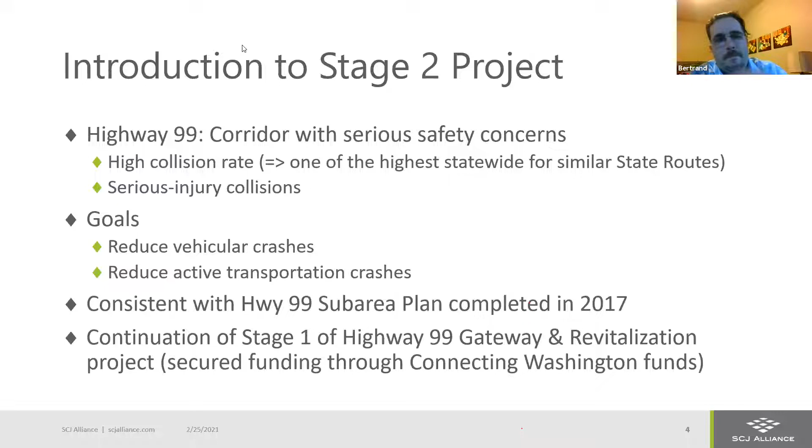A lot of you might already be familiar with the limits of this project, but here's a quick overview. We're looking to do this on the bottom side of the picture on the right, from the south end at 244th all the way to 210th, which is the northern end within Edmonds. You can see the yellow areas delineated — those are the different agencies or jurisdictions along the corridor. It's not just an Edmonds corridor.

As Lisa shows, there's Esperance, which is Snohomish County, so we have to coordinate with them. On the east side of the corridor, south of 216th is Lynnwood and Mountlake Terrace — the southern end, just north of 220th, is Mountlake Terrace. As you go further north it slices to Lynnwood, which continues to the northern end of the corridor. So there's definitely coordination we're doing with this project with those agencies.

On the south end you have the SR 104 interchange, and there are some important active transportation corridors within proximity of the project. There's the Interurban Trail, shown as the blue line, ranging from less than a half mile from the corridor for most of the stretch. You also have the future light rail Mountlake Terrace transit station, currently being built. By 2024 that will be completed, generating a lot of traffic and active transportation users.

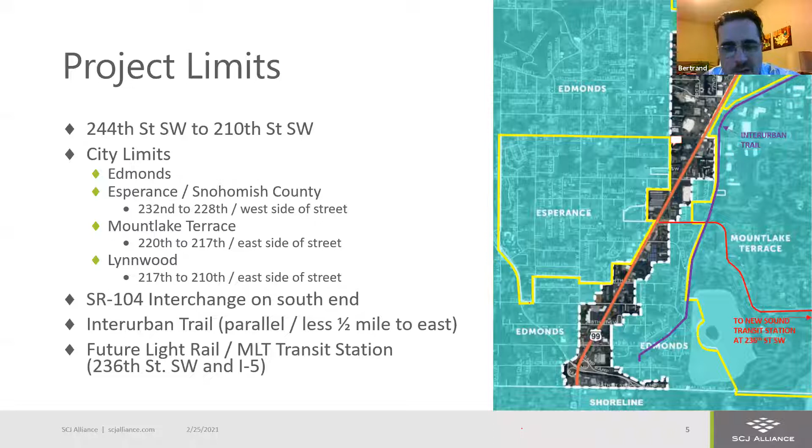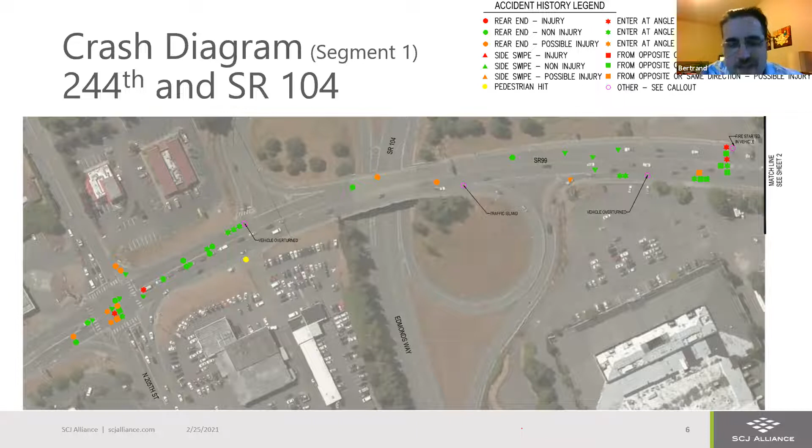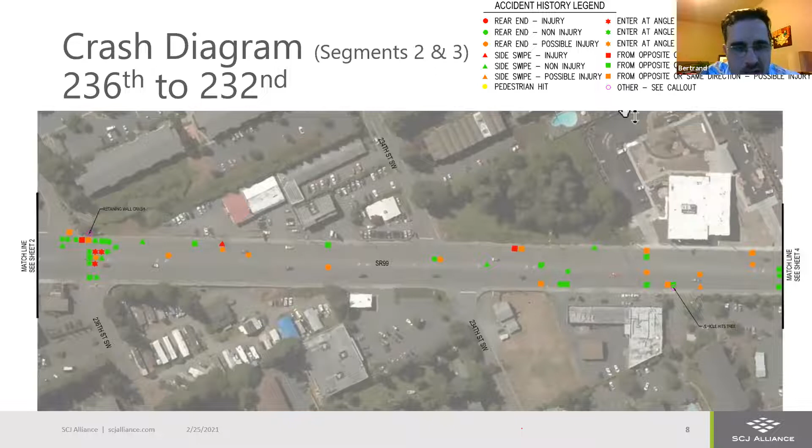We wanted to show there are a lot of accidents. Starting on the south end, I won't go into detail on all of them, but basically all the dots shown are accidents, and the colors and shapes depend on the severity and type of collision — whether cars crashed from opposite directions, rear-end collisions, or pedestrian collisions. The yellow ones are pedestrian collisions from the last three years, from 2017 to 2019, when Lisa's team ran the accident history. Further north you can see a series of accidents, whether at intersections or mid-block, signalized or non-signalized. It's not the same number throughout, but accidents are happening everywhere.

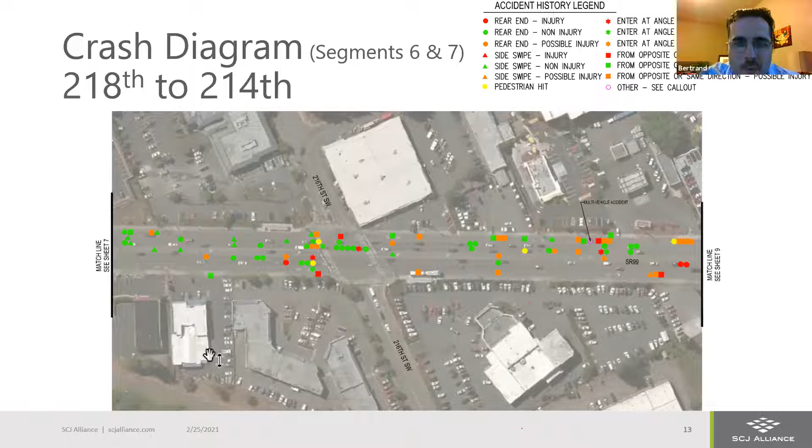That's why we want to make it a whole corridor improvement — we're not just addressing a short stretch, we want to do the whole 2.5 miles. Near the northern end, as you can see, there are a lot of accidents throughout that 84-foot curb-to-curb space. The next slide will show a summary of all those accidents.

This slide shows a summary of all those accidents, with the severity shown in the bottom left corner. At the top, you see about 7.52 crashes per million miles traveled, which, as I said in the intro, is a lot higher than most state routes throughout Washington State.

That's a really high rate, and that's why the state is definitely supportive of this project as well.

Just a quick overview of those tables: in 2017, '18, and '19, there's been about 200 accidents per year on an annual basis, which is a little over 650 in a 3-year period. If you average that out daily, there's a crash almost every other day, every 2 to 3 days somewhere on the corridor. That's just to show you the magnitude of the issue.

On the top right, you have the types of crashes: a lot of rear ends, side swipes, and enter-at-an-angle collisions. The ones with higher severity are from opposite direction, which I'll go over in the next slide. The speed limit's 45, so sometimes they're going 50 miles an hour. There has been a fatality in that 3-year period, but there's been a lot of serious accidents.

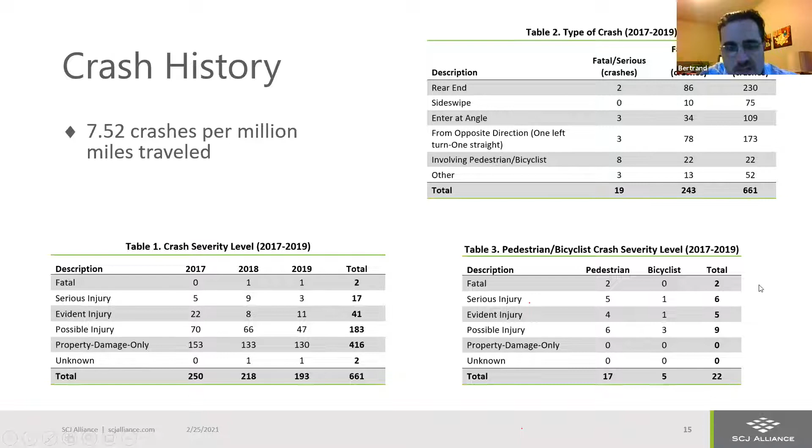Next slide, please. This is the one I was showing you in terms of opposite direction. What's happening here, if you look at the diagram on the left, imagine we're at a signalized intersection. There's northbound traffic approaching, on a red light, and a queue starts building up. Obviously they can't go. The vehicles that are there, and a left turn vehicle in the opposite direction, is trying to make a left turn into a driveway most of the time.

What's happening is the 2 vehicles in the general purpose lanes leave a gap, called a courtesy gap. They're telling V1, the left turner, 'oh yeah, you can go ahead, I'm on a red light so I'm not going anywhere, I'll give you a gap to make it more efficient, go ahead and make that turn.'

However, the car in V1 is not seeing the car in V2, which is in the BAT lane — the outside lane, not for through vehicles, except for a bus going through the signal. Their sightlines are really poor, so V1 and V2 can't see each other at all, and V1 is thinking it's clear.

That's what's creating the serious accidents, because that V2 car is probably going 40 to 50 miles an hour, since the signal could be 300 or 400 feet away or more. So they're braking a little, but still at a good speed. That's one of the main crash types we're trying to eliminate, to get rid of these serious injury collisions. This project that Lisa will go into more detail on would address a lot of those.

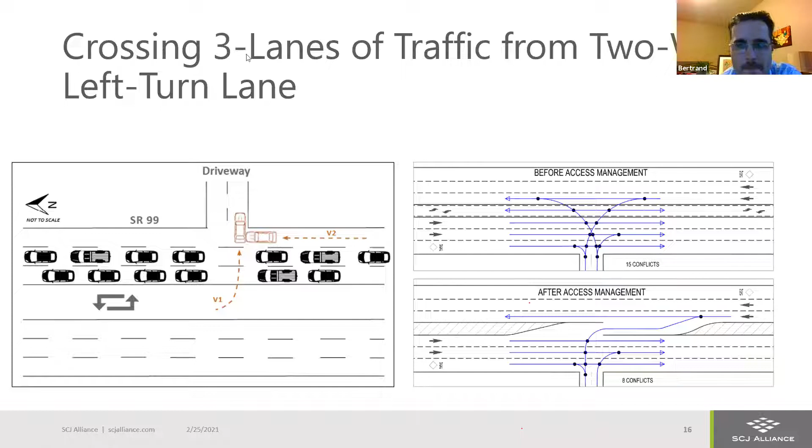So I'm going to talk to you about the proposed improvements. There are really three different categories of improvements that we want to share with you.

The first is the installation of a raised landscaped median along the entire corridor with mid-block left turn pockets, so left and U-turn pockets at the signalized intersections, and also at unsignalized intersections for the most part. We looked at the mid-blocks, but this raised median is intended for access control—to control where we can make left-hand turns, which improves a lot of those accidents Bertrand was just talking about by reducing the number of conflict points.

The second big element of the improvements is a pedestrian-actuated signal crossing. I'll show you where that's being proposed and a couple options for that. And finally, we're looking at adding gateway signage on each end of the project limits—signs welcoming drivers to the City of Edmonds.

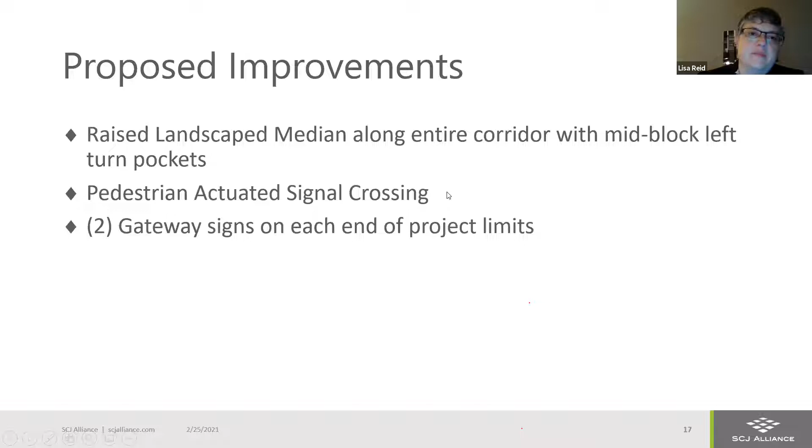This is kind of a plan view looking down on the road of what a landscape median would look like, showing the different zones. There's a spot next to a lane where we've got a curb, and as it starts to widen out, these are 6-inch curbs, we have some treated landscaping or hardscaping proposed, and then we gradually add bushes and shrubs as we get a little bit wider. When we get wide enough, we actually raise the median to 18 inches.

So it's not just a 6-inch curb, it's an 18-inch curb, and then we can put trees in the median. We have to do that behind the raised median because we want to prevent people from running into those mature trees, and to do that, we need to have a little higher curb height.

This is the existing cross section of the road, showing from the face of this curb to the face of this curb over here—84 feet of pavement, pretty typical throughout the entire corridor. In each direction you've got 2 lanes of traffic, and then what Bertrand referred to as the BAT lane, the business access and transit lane. So you're either making a right at a signal or intersection, or into a business, or continuing through if you're a bus. Same over here.

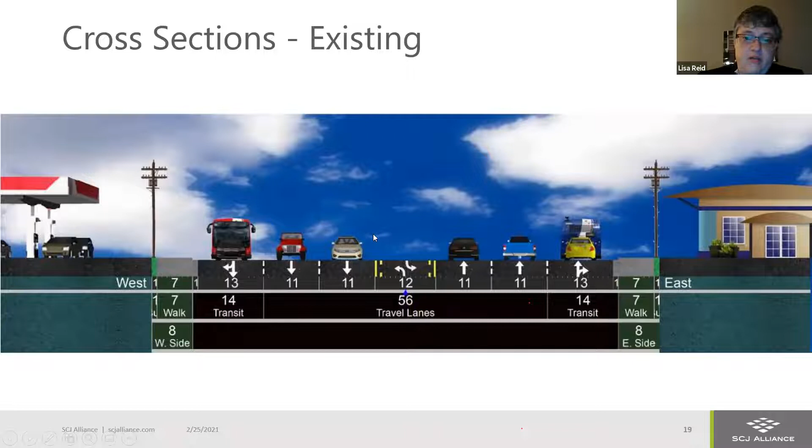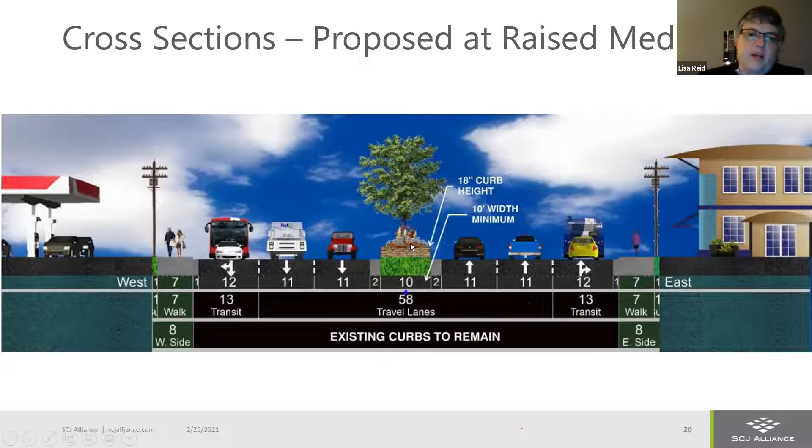This shows a profile view of what this raised median would look like—it's a little bit higher in comparison to the cars. We've got this 2-foot distance, what we call shy distance, to prevent vehicles from clipping that curb. And then when we're 18 inches high, we can put in trees.

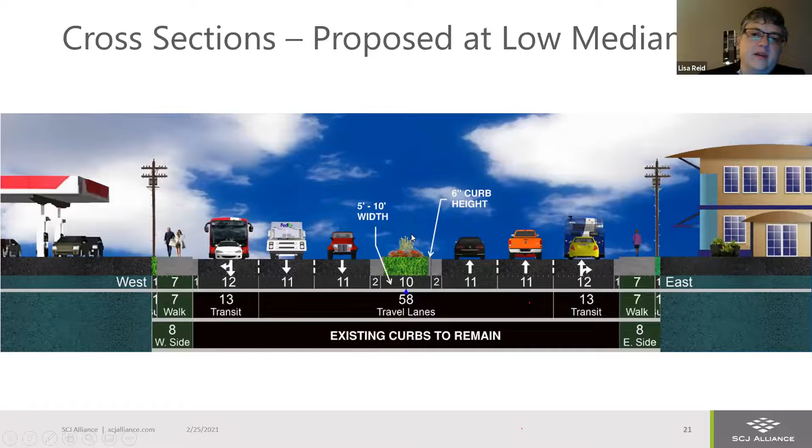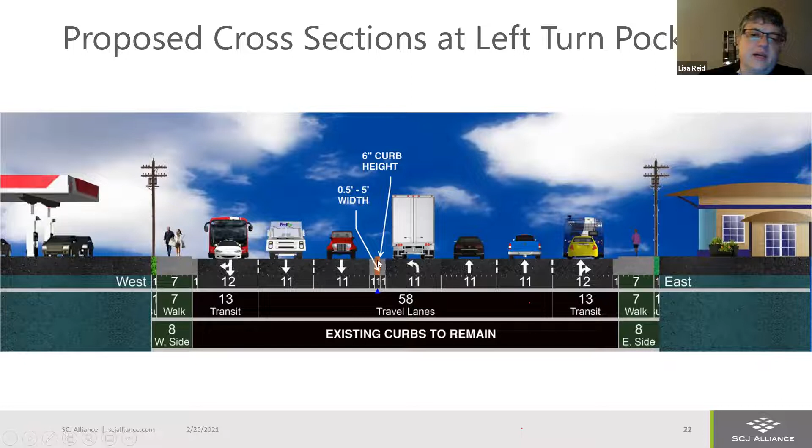This is a lower section with lower shrubs and curbs, and we actually have a 6-inch curb—this is usually in a transition zone when we're transitioning out to the 10-foot width. And this shows where we've actually got a left turn pocket, whether at an intersection or mid-block. Going in one direction, we'll have a left turn pocket, and then we end up with just a really narrow 1-foot curb next to that.

So the next thing I'm going to talk about is the process to locate left and U-turns. We put the curb in the median in the middle, then had to determine where we put left turns and U-turns. The first thing we did is we added left and U-turns at all signalized intersections.

There are existing signals at 244th, 238th, 228th, 224th, 220th, 216th, and 212th. At each one of those intersections, drivers can make left turns and U-turns out of that left turn pocket.

The length of those pockets is determined by our projection of traffic in the future year, looking at how many cars we expect to make left turns and U-turns at each intersection. Some of those are shorter, some are longer. We refer to that as a queue, or a storage length.

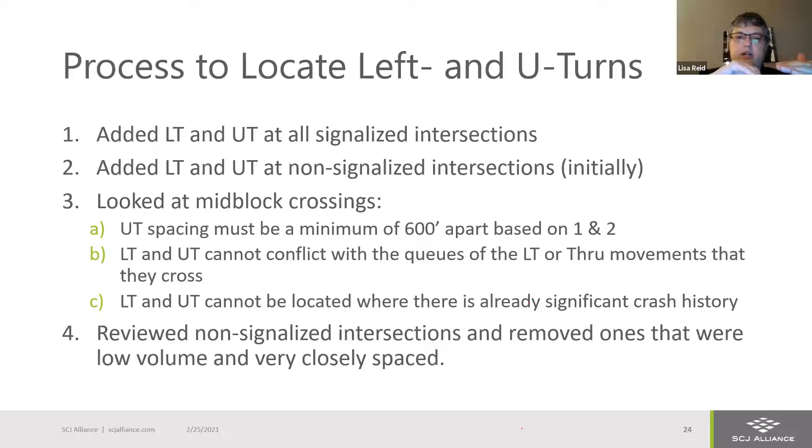This is the drawing of what we came up with. We marked the signalized intersections in orange, and the non-signalized intersections in blue, which don't occur here. We put the 600-foot spacing in green, and the area that was left gave us an opportunity.

If we were to let a left turn pocket through here going northbound, it would conflict with these storage lengths for both the through movement and the left turn pocket, so we couldn't do one northbound. And if we did one southbound, we'd have to break this left turn pocket, and we're not allowed to do that, so we didn't do that either.

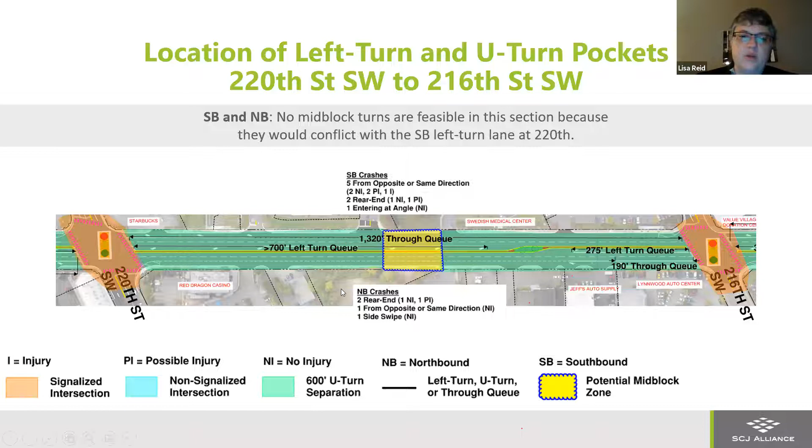The other elements we looked at were the crashes at each location to see which ones had high crash histories. We laid this out for the whole corridor to try and consistently and systemically place mid-blocks that made sense, following a set of rules so we could be consistent without giving preferential treatment to anybody.

So here we go - these are the proposed improvements. This starts at the south end of the project, at the City of Shoreline at 205th, starting at 244th.

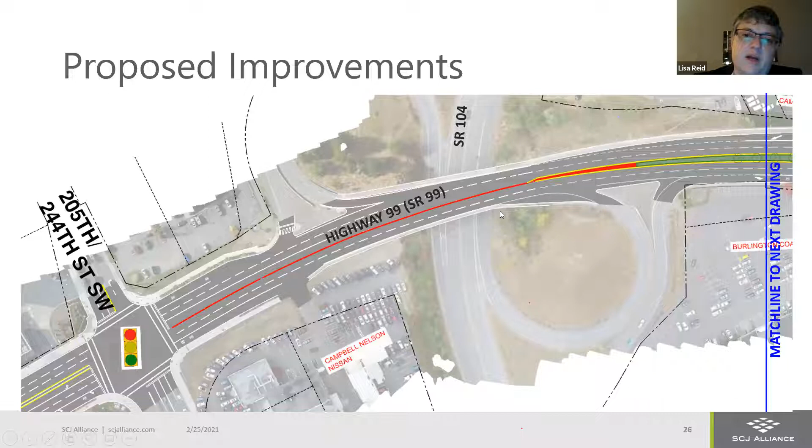For the most part, the channelization in this corridor is the same, and then it widens out. When we get to a wider spot, we'll put in curbs instead of stripes, and we can start to landscape it and install trees. We can't do anything here for mid-blocks because of the SR 104 interchange in this section.

As we continue north, we put left turns into 240th in both directions, so both can make a left turn or U-turn to come back for a missed driveway. Note that when we do this at non-signalized intersections, we prevent left turns out of the intersections. So if you wanted to come out of 240th and make a left turn, you'd have to make a right turn and then your next U-turn to effectively go left, or take other streets. There are often several opportunities to work your way around.

So this is 240th, and then 238th is a signalized intersection. We laid these out with pocket lengths designed for future traffic. Working up from 238th to 236th, this is one location where we looked at the northbound left here and a southbound left here.

We decided to take out this northbound left because it was really low volume, and we were going to put one in right here at 234th. So if you needed to get to Dollar Tree, you just have to go up a little further to 234th, and those are about 600 feet apart.

Then in here we have all the trees shown. Same treatment as at 240th, at 236th: you can't make a left out, but you can make a right out of the intersections. Then at 234th it's kind of the same thing, except this time we kept the northbound left.

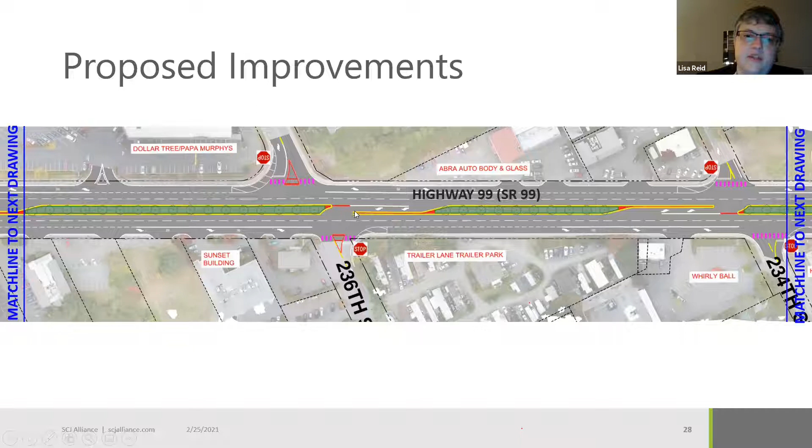This is where that new construction is for the new residential apartment. But we didn't have a southbound left because you could make that right here at 236th, then just come back a little bit further.

And then we have a long stretch between 234th and 230th at the next intersection, and this is where we proposed to put a pedestrian signal. Sometimes we call it a hawk signal, because that's one of the options we have to put in - I'll talk about those in a second. We have a crossing and two transit stops right here, and I'll show you those a little more, but we lined it up with the transit stops. I'll talk about that more in a minute.

Then this is the first mid-block crossing we get to that doesn't happen at an intersection or a non-signalized intersection - this southbound left into the Pacific Park apartment homes. That just fit really well, as you can see we're kind of between intersections. So we met that spacing requirement and we don't get into the queues for intersection signals, so we went ahead and put in the southbound one.

Looking at the next street at 230th, we have a northbound left in. And again, you can make U-turns at all of these too. So it prevents the left turns out of that intersection, but allows you to make a left or a U-turn here to get back to businesses.

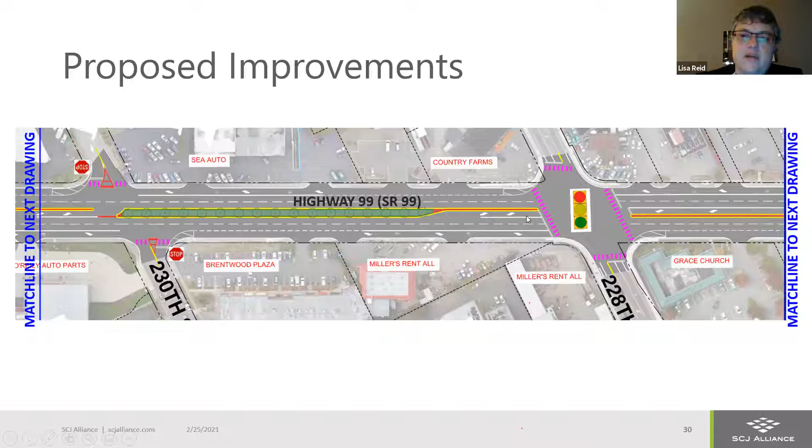Then we come up here to 228th, where we just fit those left turn pockets to the future volumes. Continuing through 228th, same thing, you've got a left turn pocket on the other side. This is where 76th Avenue is, and you know, you can't cross there anyway. There's an existing raised median for a portion of this.

We are going to modify that raised median a bit to add landscaping in there. We're not sure if we'll take it out completely or just modify it, but we feel like we should add landscaping consistent with the rest of the corridor there.

So we're in front of Ranch Market at 224th, again with a left turn at the signal, U-turn at the signal. Coming southbound at that same intersection, there's a left turn and a U-turn at the signal.

Then this kind of long block between 224th and 220th, we looked at this mid-block location and providing mid-block turns. The northbound one made sense because we have some businesses back here that we'd like to be able to get to. It met all the spacing requirements.

But when we put in the southbound one, there was - Bertrand, I think it was 36 accidents right here. We felt like that was too close to the end of the queues for the next signal down, and with that high of an accident rate, we felt like that was one we should not keep open. So we didn't put a southbound mid-block turn here.

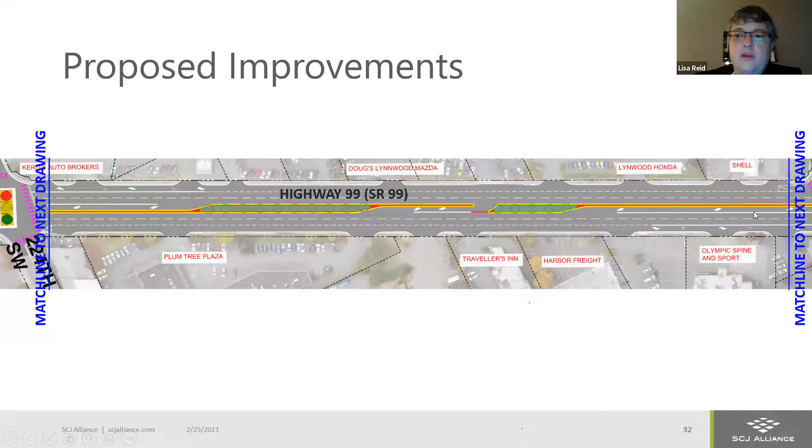Then again, you're working your way up to a signal at 220th, so you have the left turn pockets at 220th. As you guys know, operations at 220th, 216th, and 212th are a lot slower than further south on the corridor, so you see that kind of commensurate with longer left turn pockets.

And again, left turn and U-turn pockets. We have a little bit of landscaping and we get right into the left turn pocket at 216th. So on that block, we really didn't have any spacing to put in a mid-block turn.

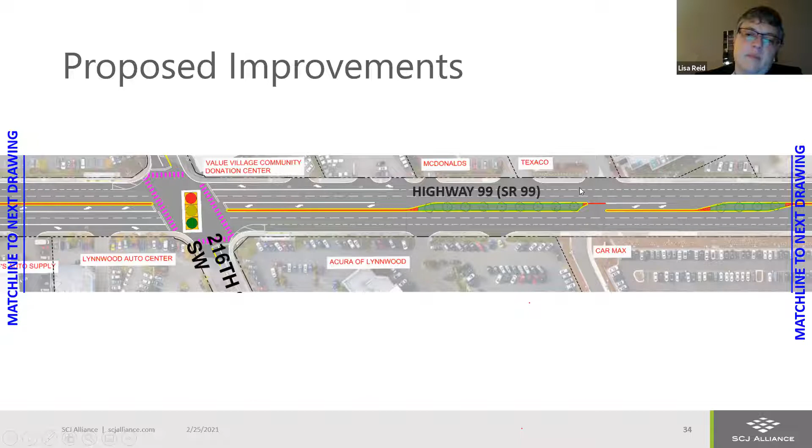Then between 216th and 212th, about midway, we put in a southbound left turn into CarMax. Although it only serves CarMax on this side, all the businesses over here can make that U-turn to effectively go left. We did not put a northbound mid-block crossing in here again, because there were about 17 accidents here.

We felt like that was not safe enough of a location for us to put a mid-block crossing in, and it started to conflict with the through queues, which is kind of what causes that courtesy gap that Bertrand talked about.

And then at the end of the project, we have another left turn U-turn at 212 and a southbound left turn U-turn at 212. And then we have a little island at the top, and this is about 210th. So if your address is 21000...

Right at this area, that's where the city limits end. The second element we talked about was the pedestrian signal. Looking at this in a little bit more detail, this is 234th and we're about 600 feet north of there. We're putting in a crosswalk.

When you get to the median, you actually have to turn and come across the crosswalk. So if you're walking from the east side to the west side, you'd cross the crosswalk, then turn and walk a little bit before you go across again. The reason we do that is because it forces pedestrians to turn and face oncoming traffic and take a look. You'd be amazed how many pedestrian accidents the pedestrian gets cited for not paying attention. So that helps a little bit.

We would take a transit stop that's in front of that new development and move it up here. And then there's already an existing transit stop here. So when the bus, the 101 bus, stops, you'd be able to use this to get to and from those transit stops, which is pretty handy.

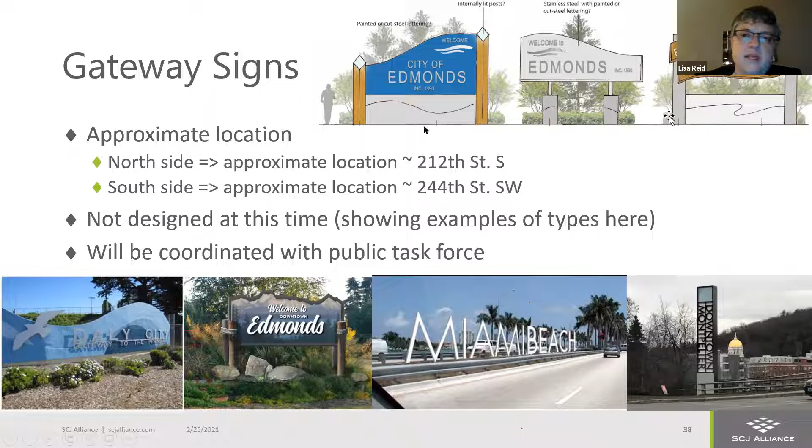And again, they're not designed right now. We're just giving examples of some types. There's actually a public task force that's been put together with members of the community, as well as Parks Department and city employees, to work on the designs of these.

So last thing, quick summary of left turn and U-turn locations: they're allowed at all signalized intersections, so every signalized intersection you come up to, you can make a left turn and a U-turn. They're allowed at most non-signalized intersections too. At 240th it's both directions, 236th southbound, 234th northbound, and 230th northbound. It's already prohibited at 76, so it'll stay that way.

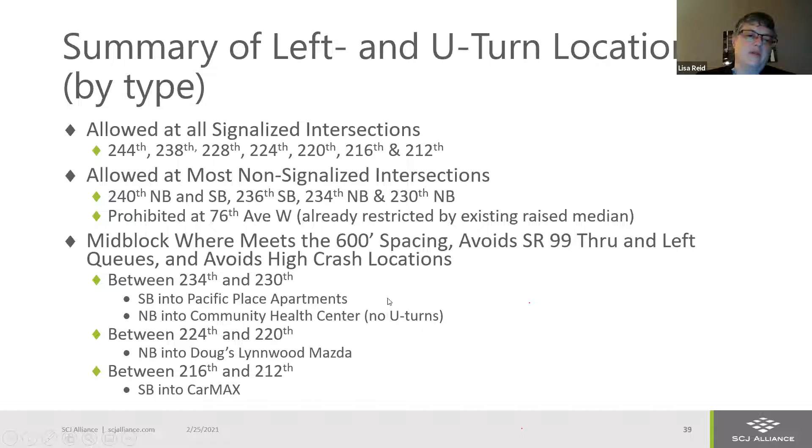And then there's some mid-block openings. There's one between 234th and 230th regardless of what that says, one into Doug's Lynnwood Mazda, and one southbound into CarMax. We looked at one into the community health center, and it was too close to have U-turns, and it also conflicted with the 600-foot spacing requirement.

So last thing, there's been a lot of studies on roads like this, before-and-after studies, where we look at two-way left turn lanes with a handful of through lanes and how they operate with the two-way left turn lane - that center lane they have now - versus putting a median in. What we found is it reduces vehicle crash rates by about 37%, and even more so the injury rate - injury severity goes down by about 48%. So a serious accident may become a property damage only accident when we have this median in there, because of the predictability of where cars are making a left turn.

You now know where they are, and we've put them in safer locations. More so, it reduces pedestrian related crashes by 45% and pedestrian fatalities by 78%. So if you just did the statistics, we'd save a life by putting this in. We had 2 pedestrian fatalities on this corridor.

It improves the flow of traffic. If you think about that two-way left turn lane being like a piece of sandpaper to traffic, it creates a lot of friction with people coming into and out of that lane. When you take that away and put a median in, traffic tends to flow a little better - not necessarily faster, but it flows better between intersections, with less stop and go.

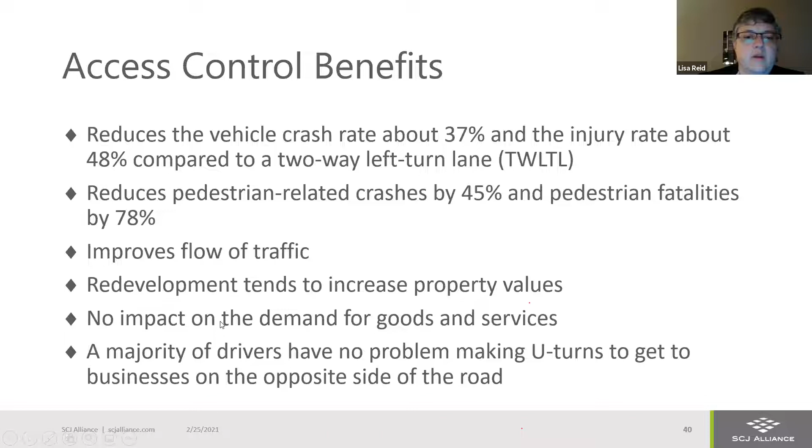The redevelopment around corridors that have been beautified tends to increase property values for adjacent properties. There's no impact on the demand for goods and services - if somebody wanted a car yesterday or a cheeseburger yesterday, they still want the car and the cheeseburger today. What they found through surveys with the public driving it is a majority of drivers have no problem making U-turns to get to businesses on the opposite side of the road. So it's actually pretty user friendly in the end.

If you guys want to see some streets that look like what we're planning to put in, the easiest one is to look at Shoreline, SR 99 in Shoreline, but also SR 522. These pictures represent these examples. There's a couple state routes in Lynnwood and Mukilteo, SR 522 in Kenmore and Bothell, and then SR 99 all the way from Burien, SeaTac, Des Moines, Kent, Federal Way has all been installing these raised medians with landscaping in them.

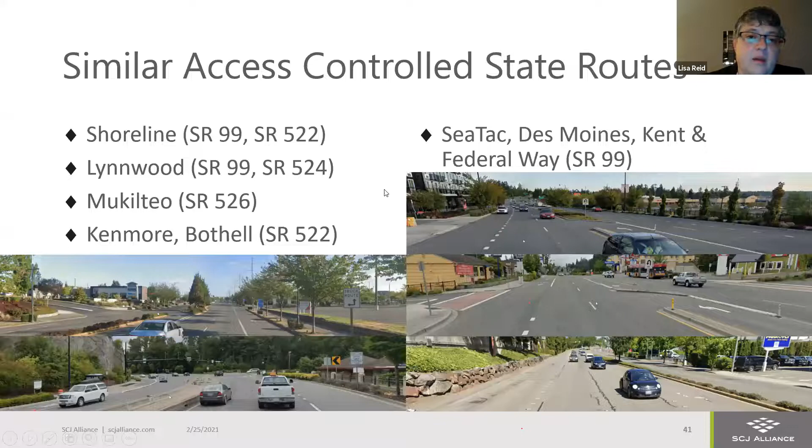With that, I'll hand it back to Bertrand.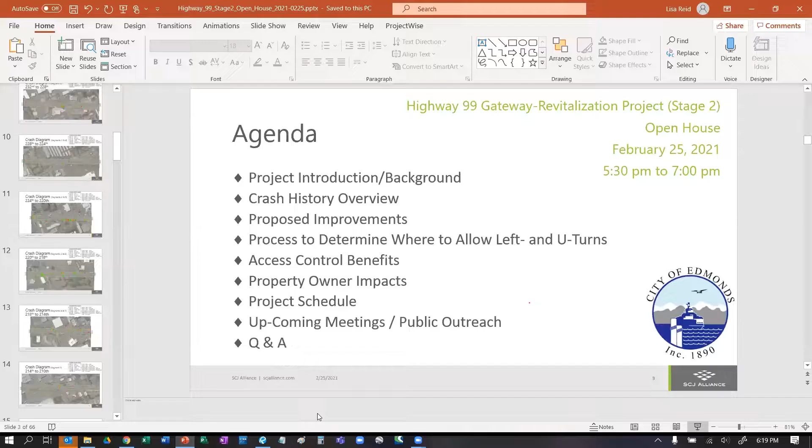I had a question about 236th and 234th. I got a little bit lost there on why it's at 234th and not at 236th, and I might not even understand where it is. Can you explain that? I was cooking dinner, so I wasn't really watching. That's fine, this will render here in a second. As you come north up the corridor, and I know it's all blurry right now, but it'll zap in here while I'm talking.

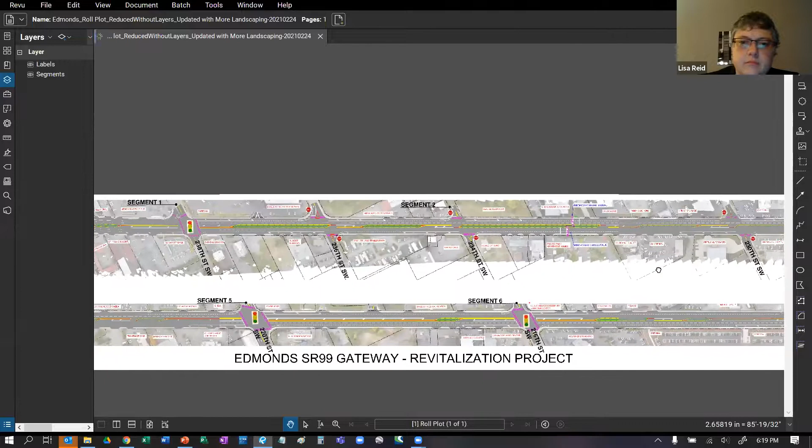As we come north up the corridor, we considered putting lefts in and lefts out at 236th, 234th, and 230th. There's 230th way down here. Especially in this spot, what we found was there's really low volumes because we took traffic counts turning left into these. So what we did is, if you were driving northbound, we made the second intersection you got to the left and U-turn, so you could still access all those businesses. The same thing going southbound - we use the second intersection for the left turn and U-turn so you can access those businesses as well. By doing that, we didn't need quite as many openings, and we didn't have to justify to WSDOT why we put in left turns with volumes like 10 cars.

And that didn't have anything to do with the number of accidents at those two places, right? At those two locations, it did not - those are the non-signalized intersections. Okay, thank you. Absolutely.

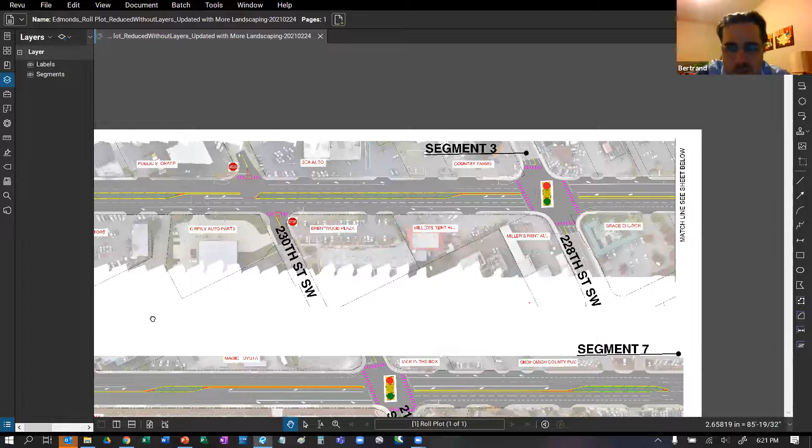There's a couple in the chat, so this one's pretty fast, the first one right here. I need to be clear about the intersection of 238 into Safeway. Will there be northbound left turns from 99 onto 238 and from 238 onto Highway 99? If not, what is the projected community impact and potential to mitigate a food desert if Safeway closes? Yeah, Lisa can put that on there.

The left turns from Highway 99 on 238 at the signal are being maintained, we're not removing that. We only made the restriction for left turns coming out of the cross streets at non-signalized intersections. So all the signalized intersections will operate the same way they do now.

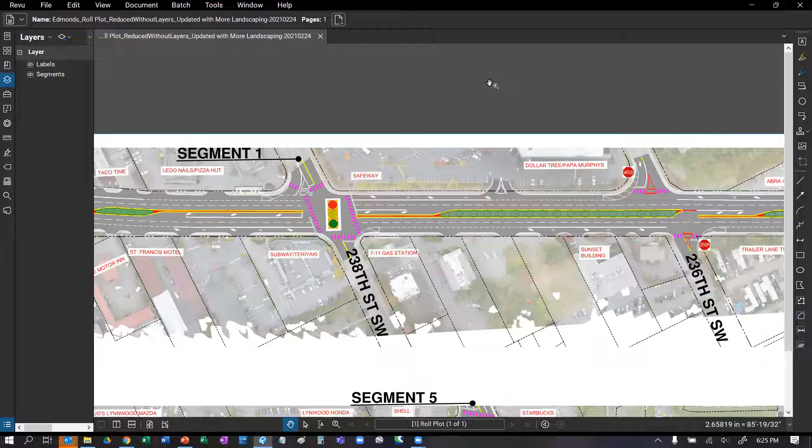Yes. Okay, so during construction, and this will be, I think, much less intrusive to our business than the Shoreline project because it doesn't involve the sidewalks, but during construction, what sort of plan is there to allow access to the dealerships, or to the different properties where these turn lanes are proposed, as they're being built? Obviously there won't be any access, so will there be temporary U-turns, or will those be set up prior to construction starting?

I'm going to take your question as a comment, and the comment would be: do everything we can to maintain business access during construction. That's a mantra we always adopt. There are limits to that, as you probably experienced in Shoreline, especially when working on the frontage improvements. Keep in mind this median project is the biggest step forward from a safety standpoint, but the frontage improvements are also planned to be replaced, over a fairly long period of time, limited by funding availability. But at some point those will be done as well. So you're escaping that impact for now, but this project will be done next year.

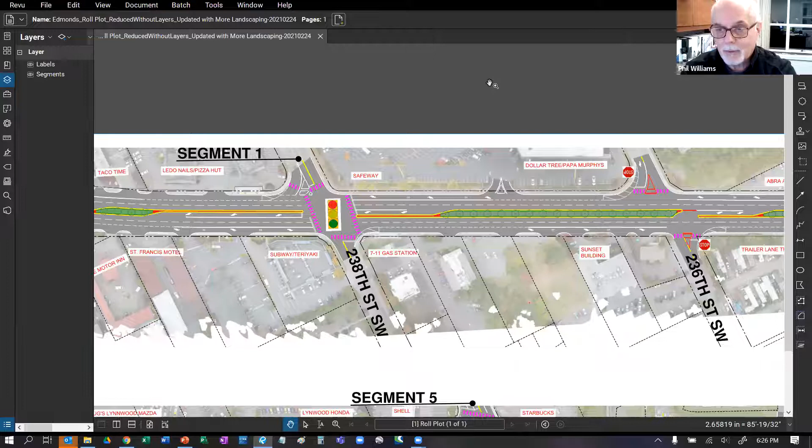And then after that, we'll be looking to pick out the first of seven stages along the corridor where we'd want to work with property owners and lessees to improve the frontage. I can't give you a lot of detail on that at this point, but you'll see that going forward. This project, relatively speaking, will be easier to build, probably have less impact on adjacent businesses than one where you try to do all of it at the same time. But details on that to follow. I think it's a great comment to make, and we'll be thinking about that a lot.

Okay, thank you very much. I appreciate it. I just wanted to add one thing regarding your first question about the vegetation. One thing we'll be looking at is definitely the sight distance from every point of view, so that the least amount of vegetation is used. We're going to try to keep it as low as possible, and obviously there's some maintenance involved, but we'll definitely look at all the sight triangles to make sure that even if it's not maintained, it won't be a sight distance issue. That's how we're going to determine where the vegetation will be placed.

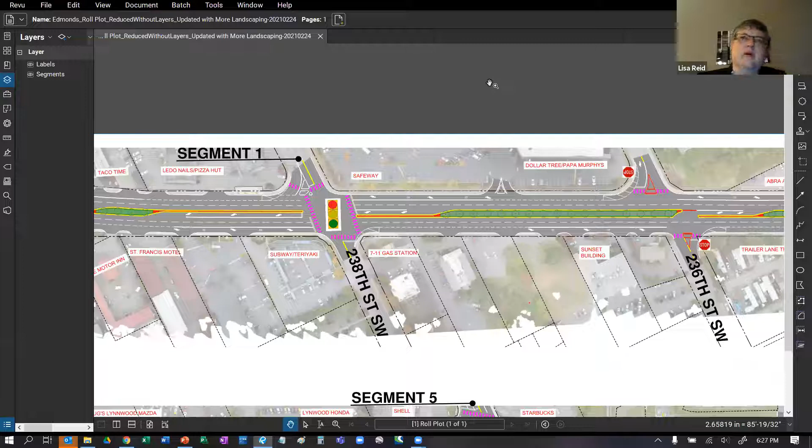We've already preliminarily picked up a list of plants. Our goal is to pick plants that are going to look great, but also choke out the weeds, planting them dense enough that they don't allow weeds to grow, really looking for solutions to that problem before we even get started.

Grasses are probably out. They look great, but they require a good deal of maintenance, so things that would grow tall. Now the trees themselves, for example what's on the screen there at 236th, that southbound left turn pocket, if the trees aren't placed right, they could be a sight issue on that inside lane. So those are all details, good to point out, and we'll be thinking about that when we get into detailed design.

It looks like Roger has a question.

Hi, thank you. I had similar concerns about the level of maintenance we can expect here after seeing the problems down in Shoreline, and I'm glad that's high on the city's radar. Do you expect to install irrigation in the planted areas of the corridor?

The simple answer is yes, we do. We aren't sure, we're really going to look toward natural landscaping, so hopefully we only have to run that for the first couple of years for plant establishment, and we're hoping we'd only have to use it in severe years after that. Okay, but it will be there. It will be there, yeah.

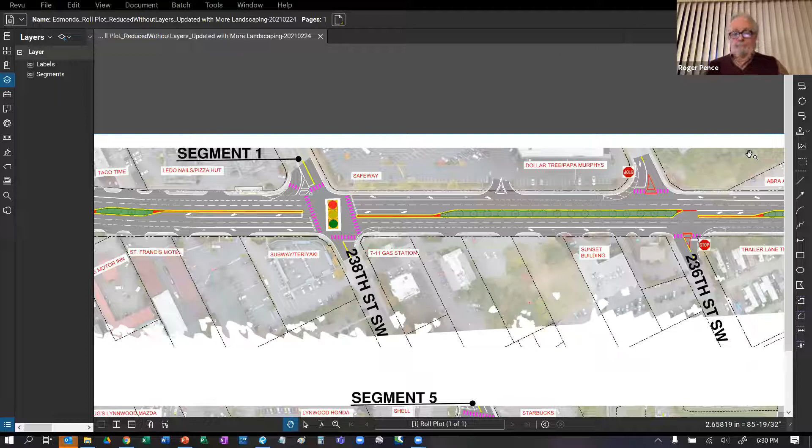Thank you, anyone else have a question? You can just click raise your hand. I got a couple, well Lisa, there's a couple in the chat, so let me read those. Go for it, Parker. There was a couple that came last, make sure I'm skipping. Okay.

This is from Mr. Hedges: it appears there's no left turn from southbound Highway 99 to 230th. If you can scroll to that, Lisa, is that in fact true? We are with Miller's Rent All, and large trucks and trailers need to be able to get into our driveway.

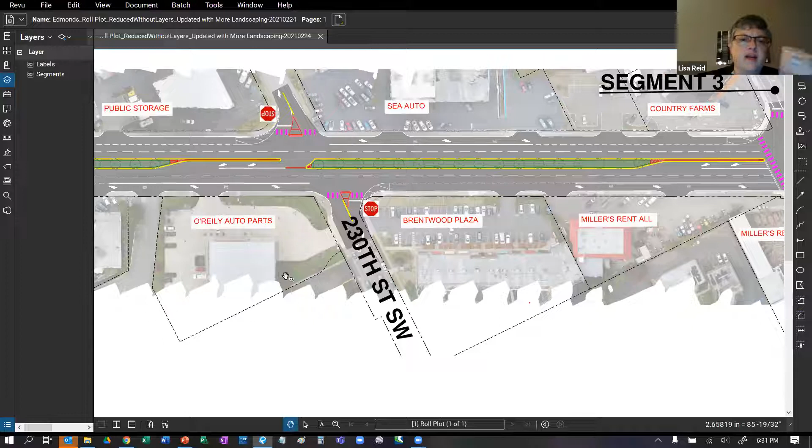So if you can go to 230th. Are you right here where it says O'Reily? Oh right, no, they're further north, just Miller's Rent All north of 230th. Oh I see, Miller's Rent All, there you go. So if you wanted to get there, I don't know if you guys can see that, let me close this real quick.

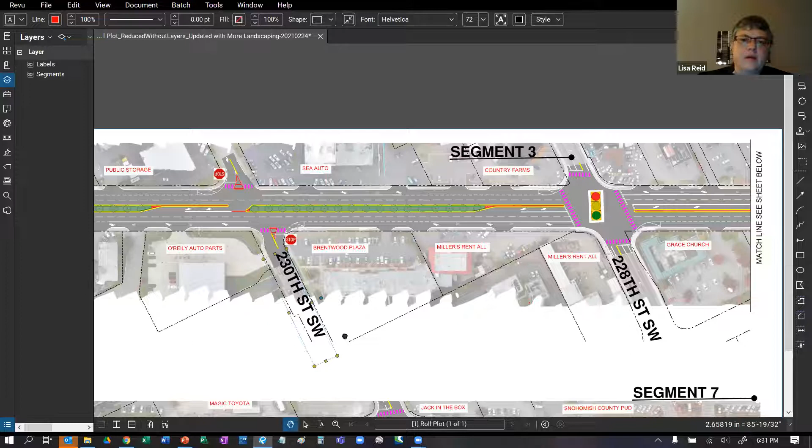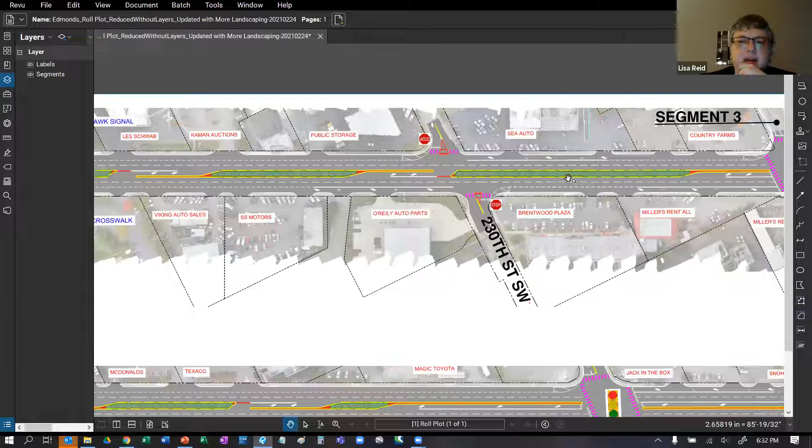If they were going northbound, they'd just turn into your driveway. Coming southbound to make a U-turn, they'd come down to this mid-block crossing, a little bit further than 230th, and make a U-turn. The question will be how big a trailer they have. It might be easier for them to come around to the next signal.

Lisa, would you describe how these were sized and what rating of truck they're really built for? They're built for a single unit truck, so like a U-Haul pickup, a long U-Haul truck for the most part, and a passenger vehicle. They're not necessarily made for semi type trucks.

We could look, and we probably should look for you guys. We can model a trailer on a car, most trailers follow the car around, but sometimes a U-turn's too sharp for them. We could take a quick look at that. I think that's probably the best answer, is we can see how you'd make a U-turn to get down here where you are.

Go to the next one. Has planning at this point considered potential increases in bike and pedestrian traffic crossing 99 to access the new light rail station, which seems likely to occur on 228th?

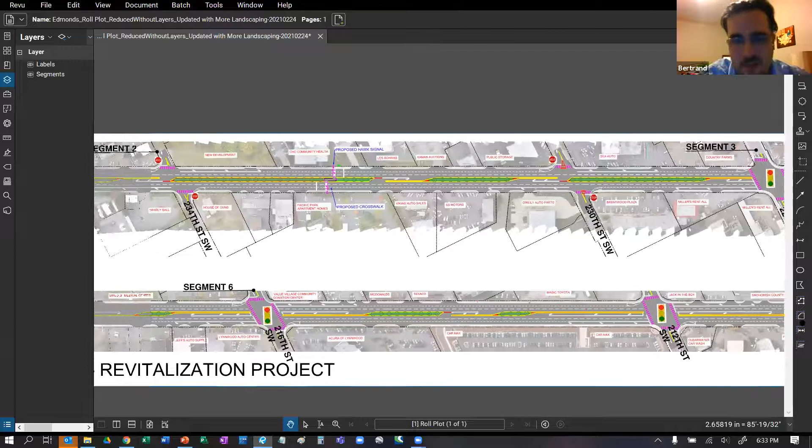When we did the 228th signal installation a couple years ago, probably 5 or 6 years now, we did add bike lanes and we have video detection. I'll have to double check, but I'm pretty sure we already have bike detection on these approaches. If not, that's a simple addition, we can do it right now, we just have to add some zones to the system so bikes would be detected as they're approaching the intersection. Especially with the new light rail station, there'll definitely be a significant increase in bike activity on this 228th corridor. It's not including this project, but it's a simple task we can do internally in our engineering department.

Let me see if there's a couple more. Lisa, do you have any raised hands right now, or others? I'll keep going on the chat. Norma and Mark still have their hands up, but that's just lingering. All right, still good to go. Okay, cool.

Will the city manage construction, or will this be done by the designer or construction management team?

We'll advertise the project and our contractor will bid for it. Then we'll select the appropriate contractor. The city will be involved, and obviously we'll have some inspectors. The city will also hire a consultant due to the size and duration of this project, to help with documentation as well as inspections. Lisa's team, as the designer, will also be involved if there are specific questions from the contractor. If we can't answer the question, we'll go to Lisa's team and they'll provide answers to the contractor.

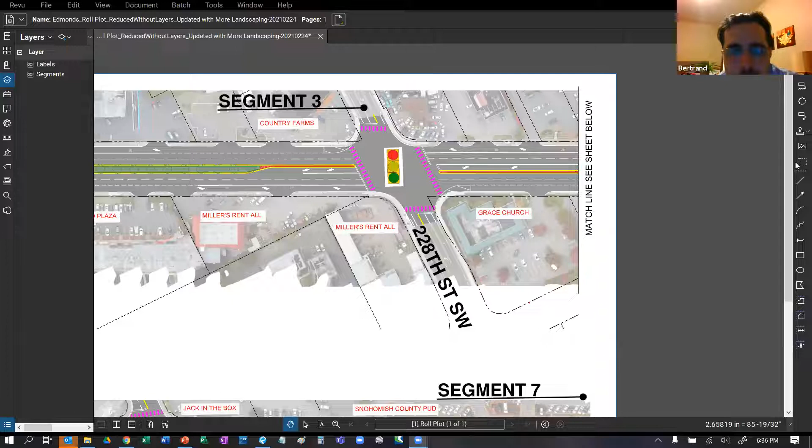What is the thought process behind not permitting a pocket left in a high collision area? Would a more defined left turn mitigate many of the collision points?

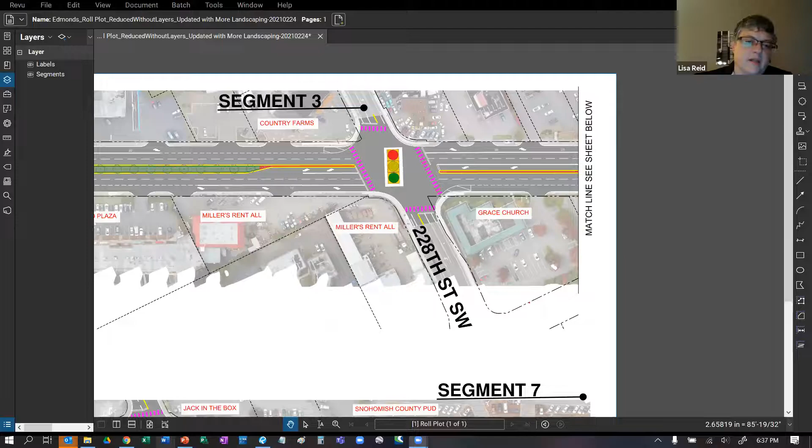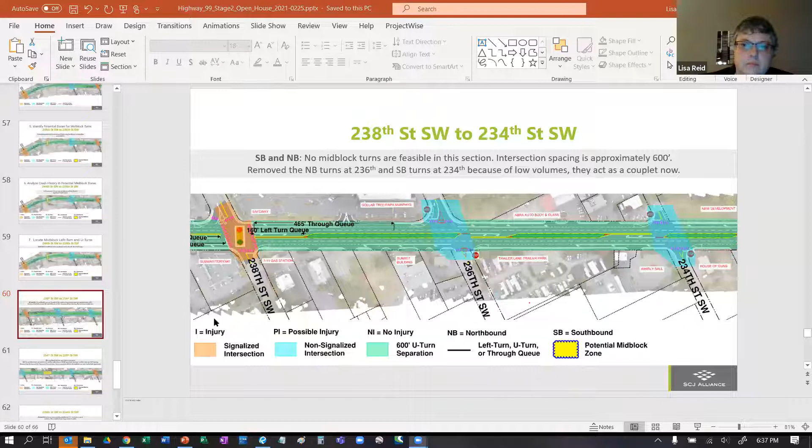Lisa, you want to address that one? Yeah, so some of it's indicative of other issues that already exist, like us already interrupting queues. Let me go back to the intersection here and see if I can find a good example for you.

Okay, so here's one where we did actually put in the pockets, and there's a couple of accidents here. But on this side, if we put a left in here coming southbound, we were looking at what we'd have: a 465-foot queue. So we're not in the left turn pocket, but this queue for the through lanes extends all the way back to the next signal, and that's where you get that courtesy gap that Bertrand was talking about. The best way for us to determine where the accidents were happening was to look at the existing accidents. Combined with the through queue that we aren't breaking through, and the fact that there are 35, 36 crashes right here of the type we can prevent, that was really the methodology.

It really only happened in a couple of locations. I think the two locations I pointed out to you, it happened there, and then northbound it happened at this CarMax, where there's 15 accidents on this other side if we went northbound. So we only went southbound here.

I couldn't unmute myself fast enough to ask if you could go to this intersection. That was actually the one I was interested in, the northbound left between McDonald's and the Texaco. So that's the reason why that was left off.

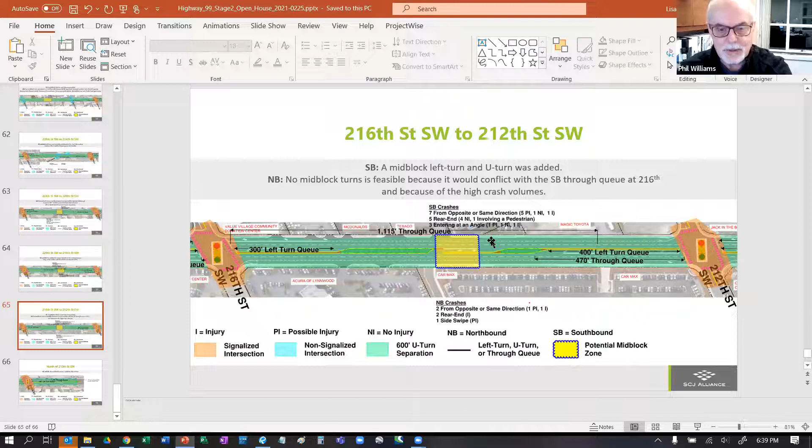I might just add something since you have this pulled up, Lisa. This is a good example. We say that we're having this southbound left turn pocket at CarMax. That's true, but in actuality, in the PM peak hour, there's only about 4 cars that make that left turn, as I recall. So we're obviously not building a turn pocket there just for CarMax.

It wouldn't be justified just to serve that business's needs in the afternoon peak hour traffic. It's really more justified by the opportunity to do a U-turn. Some people have to drive by their destination some distance to do the U-turn to get back, but we don't want that to be too long. So that's the 600-foot issue we've talked about, to make it less inconvenient.

And it will help CarMax as well, I guess, as an added benefit the other 23 hours of the day. But our focus is that PM peak hour in the afternoon, because that's the most challenging period throughout the day. And what that will do during that time is allow more U-turns too.

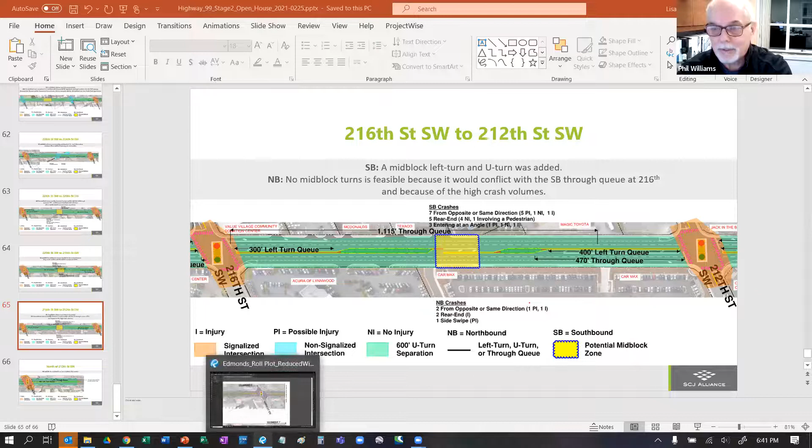Wow, that's a good question. I don't think any of us can quite answer that yet. You're looking way out in terms of time to get this finished, unless something dramatic happens at the federal level to increase the amount of available funding for transportation projects that come to the state and local governments. It's probably, you're asking us to project out quite a long ways. We could start at one end and work towards the other.

Right now the city has something of a focus on the far south end of this corridor, and we're doing some community renewal planning. We're going to develop a plan for the south end. There's quite a few problems down there, less of them transportation related and more of them social related issues. That's what the community renewal plan is trying to address. But it makes sense to blend that in with the transportation improvements that'll also be put in there. So that probably would be the city's preference currently for the next project on the corridor.

And then after that, it's a little less clear what the third one would be. Okay, and then as the project goes along, will there be temporary driveway closures along the project, or will most of the work stay in the median area?

I think inevitably there will be some. That's always a difficult but important coordination that has to take place between the businesses, the property owners, and the project to try to make it as convenient as possible. It's never convenient, but we try to make it less inconvenient as much as we can. All right, I appreciate it.

Thank you, Mike. I just want to clarify, Phil answered the process for getting all of the improvements done for what we call the stage one project. Was your question specific to how this median project's going to get constructed, like which sequence that was going to go in? Yeah, because back in the presentation, some of the slides had green backgrounds that said like section 1, section 2.

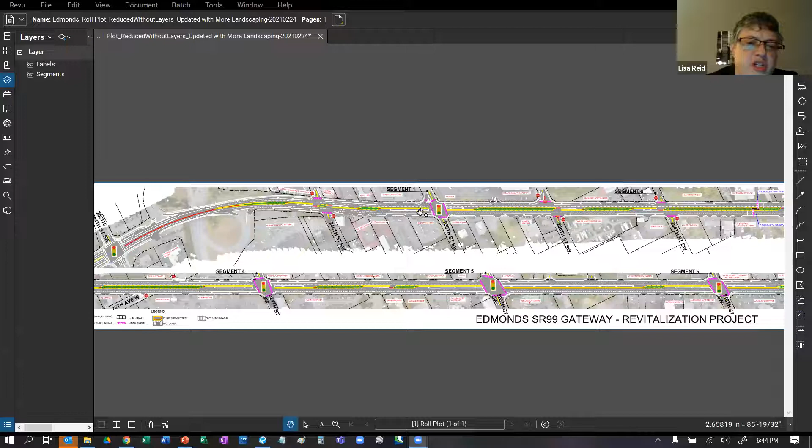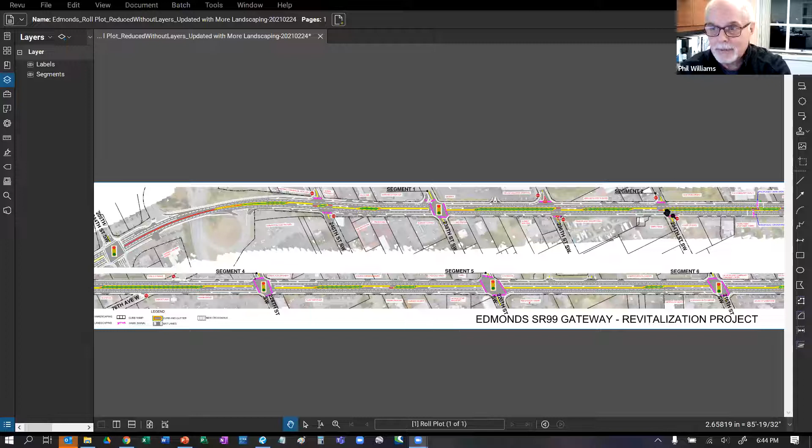Okay, I expect that they'll work in more than one segment, more than one block at a time, just trying to do light work as they move down the corridor. Once we get a contractor selected, there'll be a certain amount of flexibility given to the contractor as to what their bid was based on, what sequence they want to use. We may dictate some of that in the plans and specifications, but the more things you put in there that dictate how they do things, the cost generally goes up. So there'll be some means and methods flexibility for the contractor, as is normally the case.

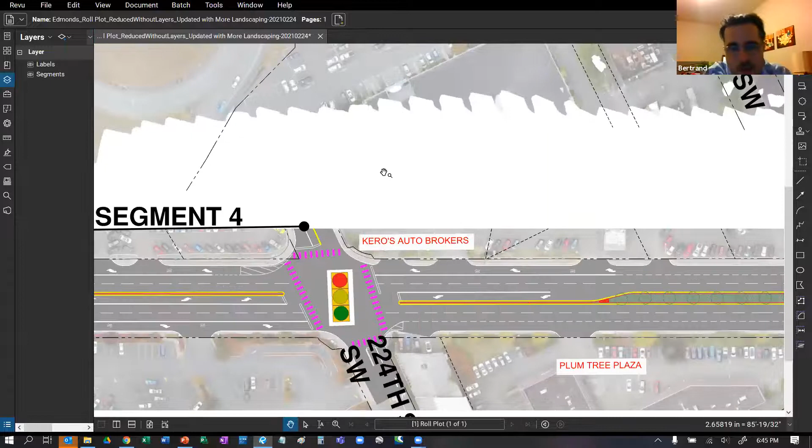Right now there's a right turn lane in the eastbound direction, and then there's a combo left/through lane for the eastbound direction. We're actually looking at maybe doing some striping changes to modify that, because it looks like there's some confusion from a vehicle point of view right now. I don't want to go into too much detail, but the person that sent it, Brenda, if you can contact me we can have a discussion about this, because I'm looking to do some striping changes hopefully later this spring or summer at this intersection.

I'd like to bring that up, maybe have a side discussion. That'd be great. Thank you.

Another thing, regarding pedestrian safety, we added pedestrian leading intervals a couple years or last year. Basically, when a pedestrian pushes the push button and the walk sign turns on, the vehicles don't get the green at the same time. There's about a 3-second delay that enables the pedestrian to start crossing. They're already in the crosswalk a little bit, which gains more visibility with drivers. So that has added some safety, but we can also talk about that if you'd like.

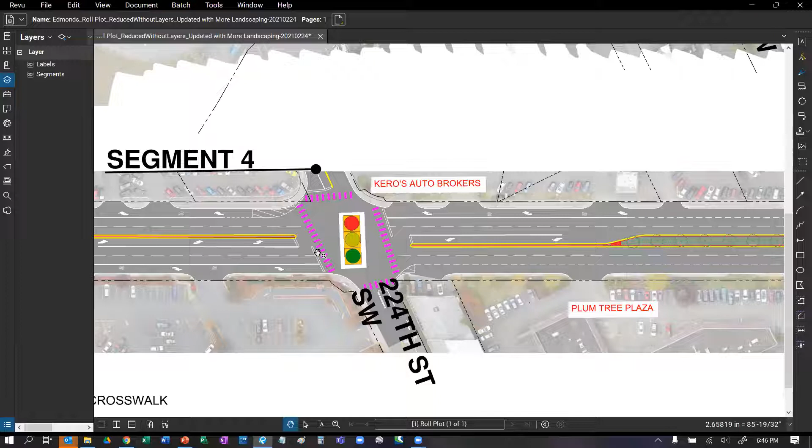Actually, my pedestrian question was about the next block down, at 224th and 73rd place, walking west on 224th. The first turn onto 73rd, the corner where Mountlake Terrace comes in, that particular intersection has a lot of pedestrians, and cars come through there and don't always stop. There isn't a great pedestrian area, but there are a lot of pedestrians coming into the condo complex and then headed south on 73rd.

Let's talk about that separately since it's not really related to this project, so other people aren't involved in that. If you can call me or send me an email, I'd be more than willing to answer your questions.

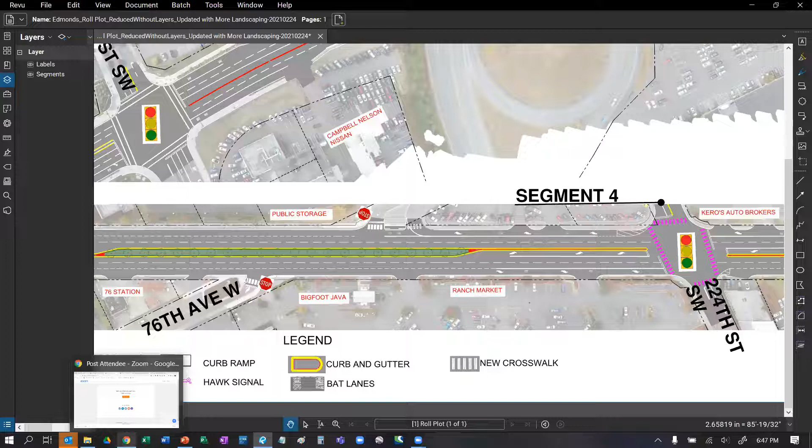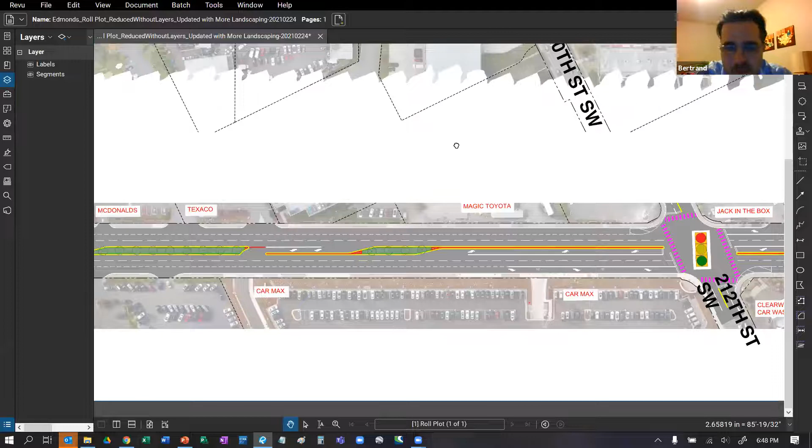Thank you. And then there was another question regarding changing the timing at 212th and Highway 99. That intersection does have some challenges. Right now the eastbound and westbound movements are split phase, meaning they're not going concurrently, and that's the main issue at that intersection. In the long term we want to improve this intersection with some capacity improvements, adding left turn lanes as well as potentially right turn lanes, so it becomes a lot more efficient. The delay at that intersection right now is pretty significant.

We want to improve that, but that's not part of this project because of the funding. That'll be part of the phase one I was initially talking about, the $184 million. That'll be part of that improvement — we'll want to improve the signal phasing and the whole intersection from a signal point of view.

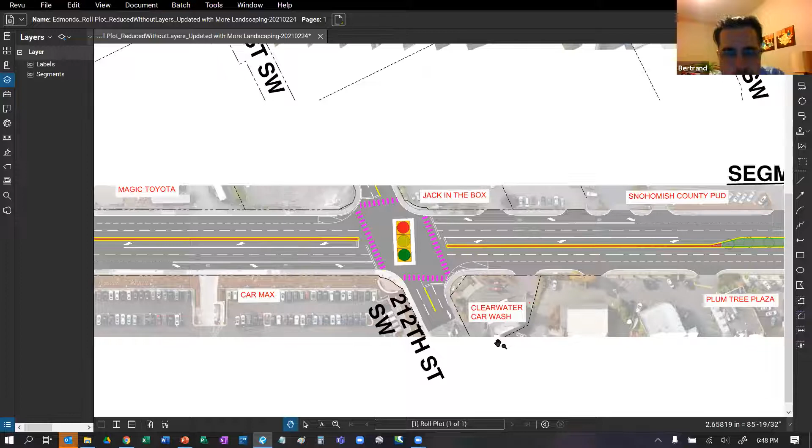It's probably good to mention again, this is a really big project. Ultimately you're just looking at a small window of it with this median project to start out with. There's all the frontage improvements mentioned earlier, and a variety of significant intersection improvements that will also be pursued over the years. That's the $184 million, which probably will be a lot more than that before it's ever done, and I think that's in about 2017 dollars at this point.

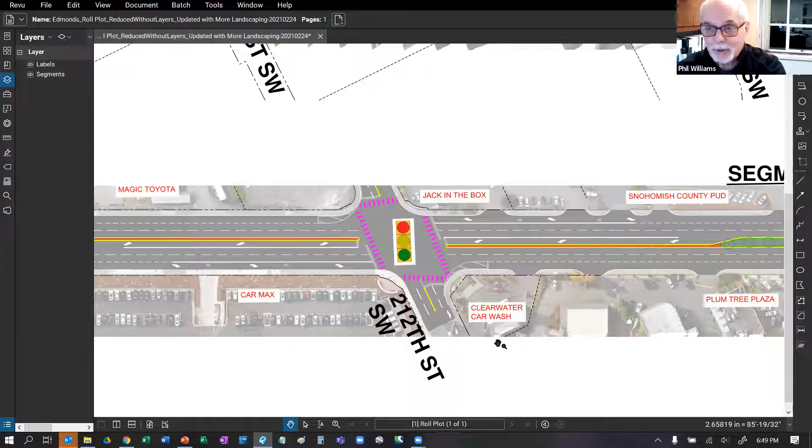But that gives you an idea of the effort involved. Pretty much everything along Highway 99 will change from back of sidewalk to back of sidewalk, and at every intersection there will be improvements made. Traffic volumes will be going up over that time. We expect development pressure like what took place in Shoreline right after, during, and after their Highway 99 project, and that's coming north now — it's headed our way. We've already got two great big residential projects.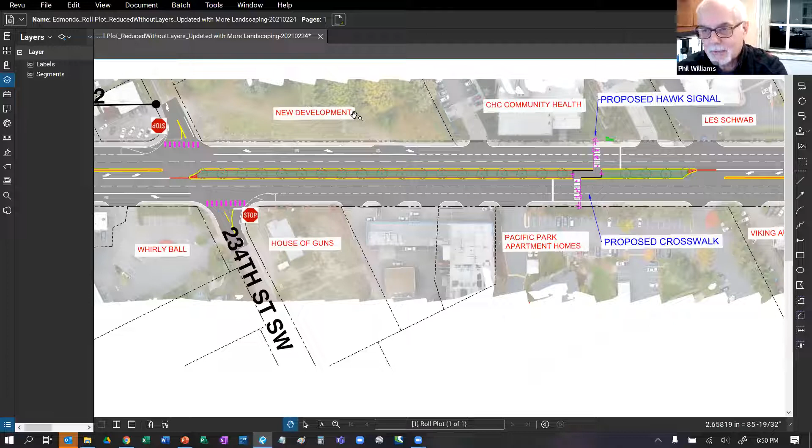One on the northwest corner of 234th, and one on the southeast corner of 236th — I think that's well over 200 units, and the first one was like 193 units. Driving along Highway 99, you can see there's probably going to be some changes over time in some existing businesses and properties that are ripe for redevelopment. That's going to increase the amount of local traffic and pedestrians, and all that has to be handled by this transportation system.

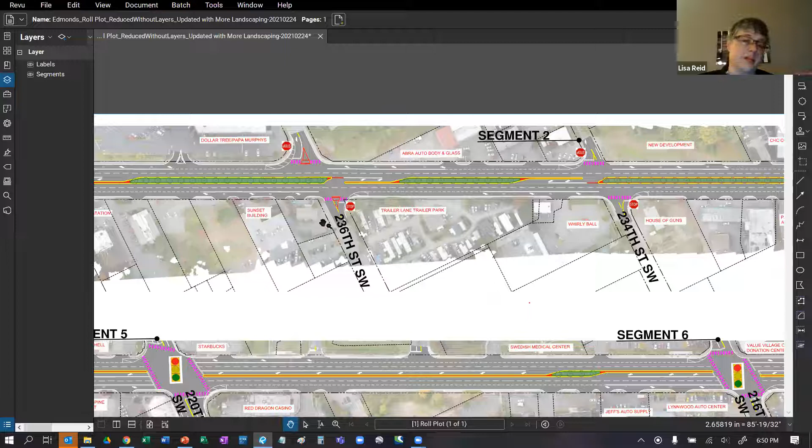If you go out on the website, it's edmondscorridor99.org. We talk a little bit about the big project, which is the stage 1 piece, and this project, which is the stage 2 piece. So you can get a little more info on the big picture too.

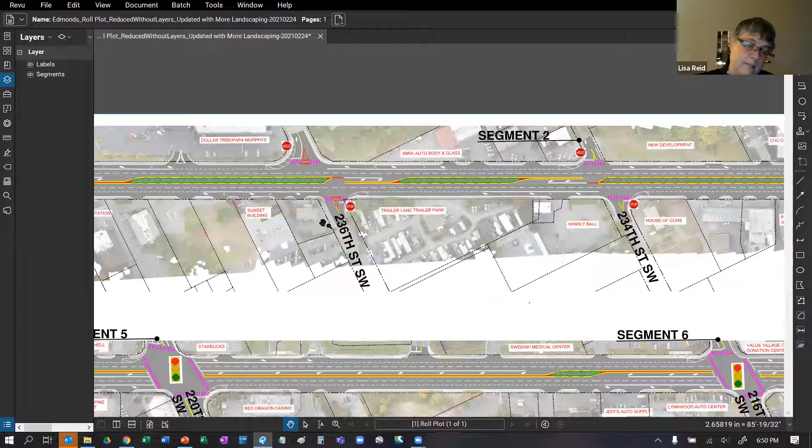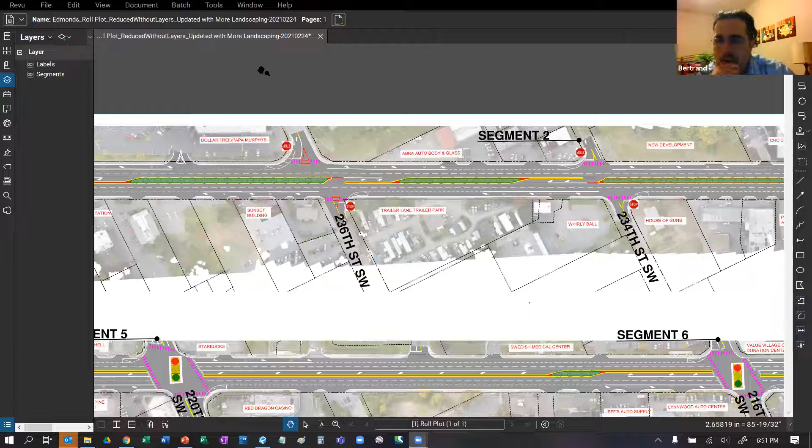Lisa, I don't have any other chat question, but does Hank have a question? Yep, I see his hand up. Yeah, I do have a question, but first, thank you for an excellent presentation.

I missed the first 10 minutes, so maybe you covered my question then, and if so, I apologize. But as you know, I'm a bicyclist, and rarely I ride the full length of 99 through Edmonds, but more frequently I go up there, particularly now that we have better access from the north. I may want to cover just a couple blocks along Highway 99 on my bicycle. Can you tell me what is being done to accommodate bicyclists and make it so that we can access the shopping there? I'd expect there aren't too many bicyclists right now, but you'll probably find a lot more with the greater use of electric bikes. So has that been considered? Thank you.

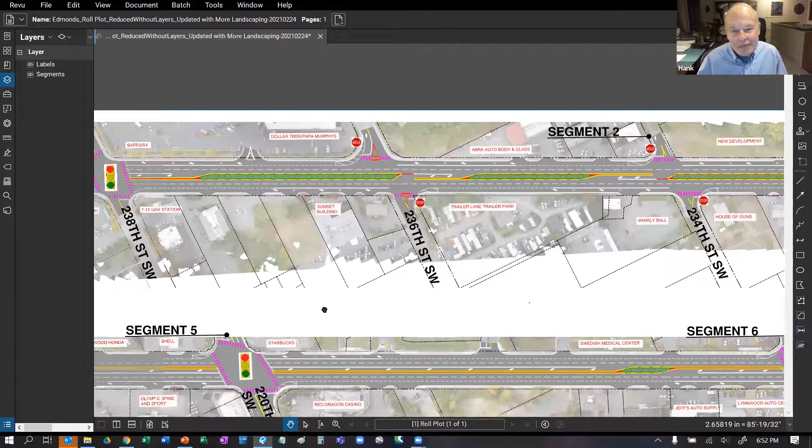Do you want me to try that, Phil? Yeah, go ahead and start.

When we looked at the ultimate project, I'm showing you this intersection for a reason. We actually need in several locations to put in dual left turn lanes. 220th is one of them. The left turn movements, both northbound and southbound, are so significant, and to get the signal timing set so the level of service isn't as bad as it is now, we're going to have to add another left turn pocket here and another here, side by side. When we do that, you can see how close we are to this building already, and we're into this really close to the Shell building too. That happens up and down the corridor in a couple places where we need to widen the roadway.

And that's without considering bike facilities. Nobody has added bike facilities on SR 99. It's not the right route for that because we've got the Interurban Trail for the bikes, but I get what you're talking about, the local access part. I think that's going to have to be mostly managed with the new sidewalks that are supposed to be installed. We don't like bikes on sidewalks, but it'll be the safest place to go with a little wider sidewalk that'll be constructed. You can't see that improvement here, but the goal is to keep the majority of the traffic on the Interurban Trail with connections at each intersection going east-west. Then as you have to access a business, like you said, a block or two, we probably have to rely on the wider sidewalks for that. We just don't have the room to put in a multi-use path.

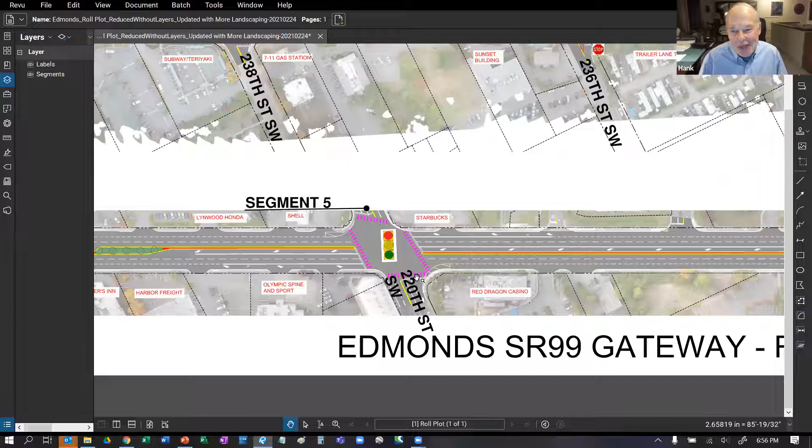So whatever you can do—the city is working on east-west connections to connect the interurban on different projects, and I appreciate that very much. But whatever you can do to make 99 safer for those bicyclists who will still use it, I'd appreciate it. I appreciate that, and we'll definitely keep it top of mind.

And I think a lot of the frontage improvements—it may not be possible for the city to fully fund all of those or expect that we will be the constructors of all of those. We may be the ones that require those frontage improvements as development or redevelopment occurs along the corridor. So I think that would be the most cost-effective way for the public to get the frontage improvements rebuilt, widen the sidewalks, put in planter strips, potentially on both sides, really warm the corridor up.

And if you get wide enough dedications of open space in front of new developments—I know it isn't the preferred method of getting back and forth for a block or two. Personally, I'm not as robust a bicyclist as you are, Hank. I'd probably roll my bike down the sidewalk. I think I'd feel a little safer there.

But like you said earlier too, the coming of mass quantities of electric bicycles, which aren't necessarily limited speed-wise to what we'd normally see today—that's going to be a really interesting situation.

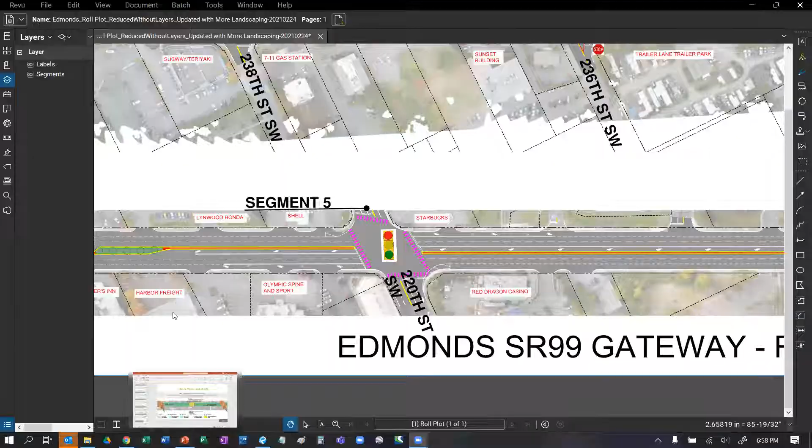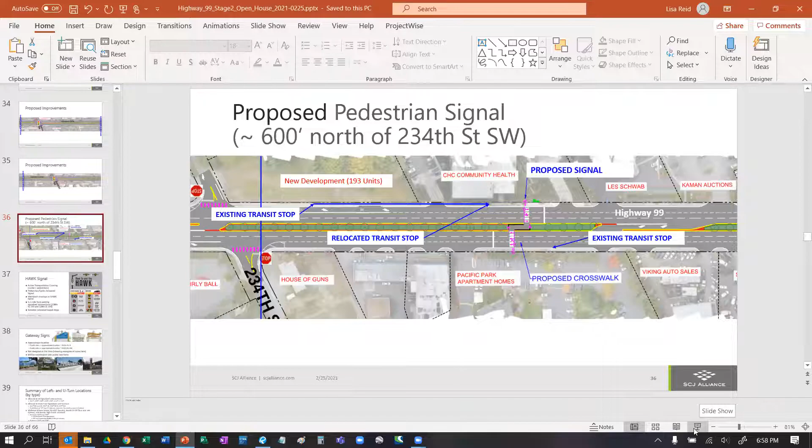Thank you, guys. Let me just jump over here. So this is the location for the proposed pedestrian-actuated signal. It's just north of 234th, about 600 feet. There's a crosswalk that zigzags, and the reason it zigzags is so we can get the pedestrians—

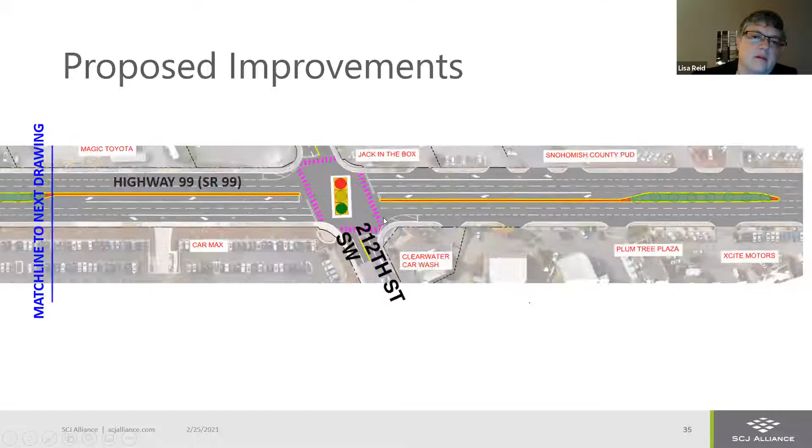I totally lost my sheet there. There we go. My mouse went crazy. So we have the crossing here for pedestrians, and we propose that be a pedestrian-actuated signal. What we haven't determined yet is whether that will be a HAWK signal or a half signal.

A half signal is red, yellow, green—works just the same way any other signal does. 99.5% of our users would never know it was a half signal. It just looks like a signal, and it's only actuated when pedestrians are there.

The other option is to put in a HAWK signal. The true difference is that in the HAWK signal, there's a stop phase where it goes all red, and then after a little bit of time, it starts to flash red. If pedestrians have cleared your direction of traffic, you're allowed to go. So we can keep traffic moving a little better with a HAWK signal than we can with a half signal. With the half signal, we'd have to give a red signal all the way across the 84-foot street.

Did that answer your questions? Do you have any more questions about how that works?

No, I was curious. I think it's really necessary, and it's going to be a great addition. I see a lot of people trying to scurry across there, sometimes not too safely, so yeah, I'm happy about it.

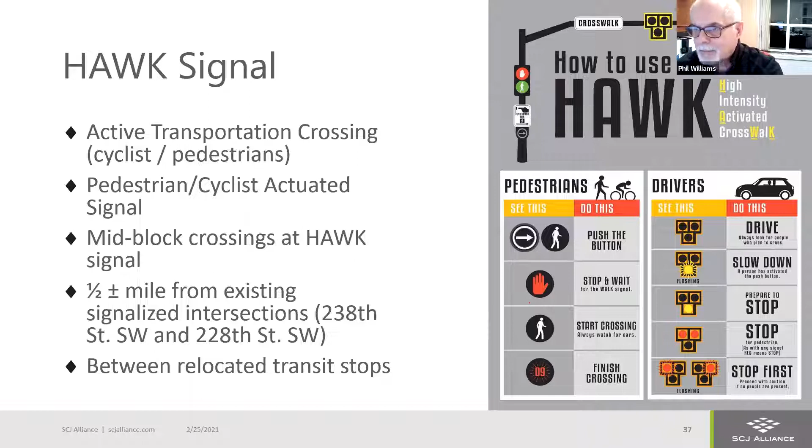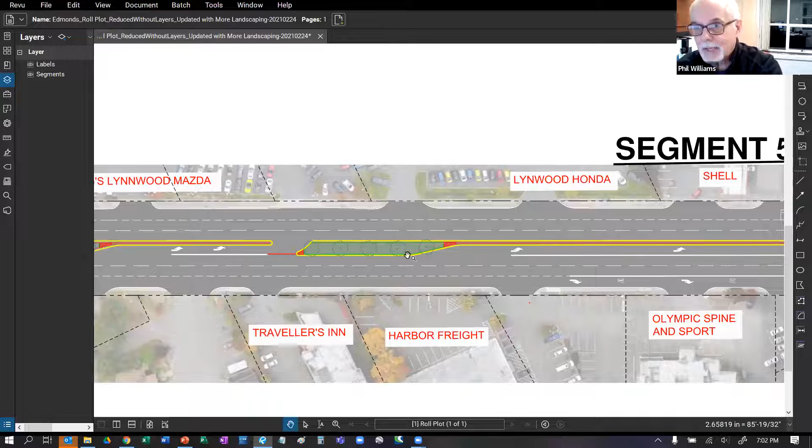But there's a lot of gaps, of course, where we have left turn pockets and intersections and so on. As she scrolls through that, the green patches are where we have ground cover and trees installed. Occasionally, like this one, there's some really long turn pockets based on the average daily traffic and particularly the PM peak hour traffic. So in some areas, we'll have long stretches of landscape median, and others they'll be fairly short.

We're going to post some of this so you can see it, but you can tell the red pattern is showing you where it's a hardscape of some sort, and the green is all landscaping. And if there's a tree in it, it's a raised median. That's the best way to figure it out. Thank you.

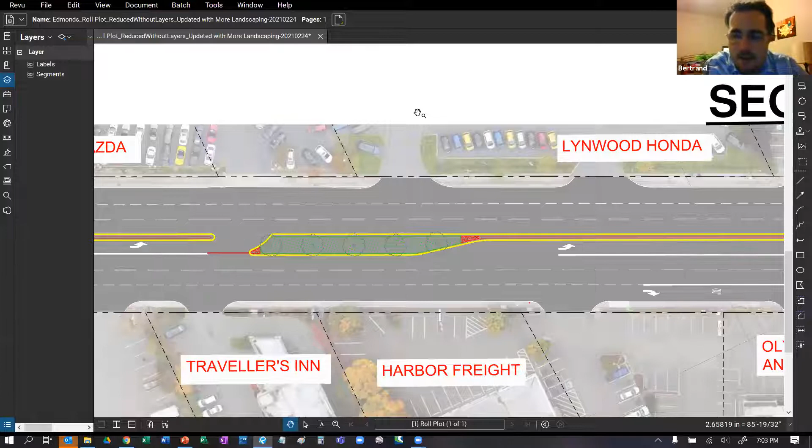There was one more question that just popped up. It says, what is your estimated timeline for redesigning the concrete structure at 76th? Will the public be able to comment on the design?

I guess I'd say quickly, I think we'd be looking for primarily consistency throughout the landscape median areas along the whole corridor, probably using, I don't know that we'll be varying the type of trees or the ground cover. If we find something that we think is the lowest maintenance, we probably go with that, but we want it to look nice. I'm not sure we'd be doing anything different in that existing median that was done a few years ago. It's hardscaped on the top. We'll try to open it up and make sure it has access to soil, and then plant something similar there. I don't think there'll be a special design on that one.

I don't know if that was the thrust of your question, the landscape design or the design of the median itself. It was the landscape design, because that concrete's not very pretty. No, it isn't. But the intent would be, I don't know if it'll all have to come out or whether the walls would stay and you could create a landscape median within that, yet to be determined.